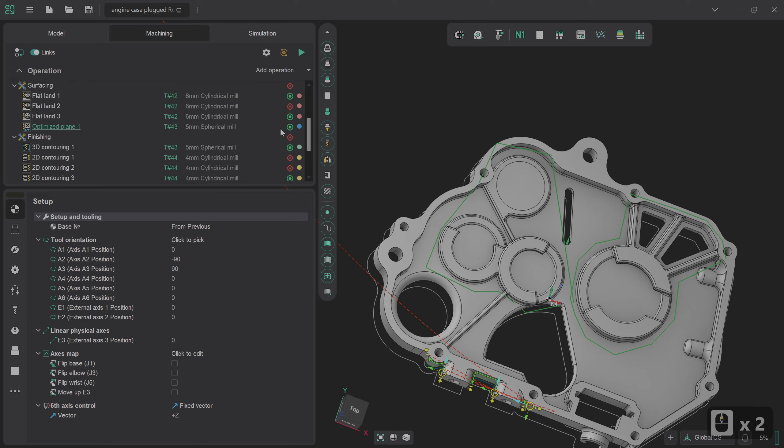So the first thing I'd like to focus on is cancelling out these red operation nodes. We're going to focus on the Flat land 2 operation first. If we click on the operation and hover the mouse over the node, it tells us what the error is, which is contact with workpiece on rapid feed.

This is an issue that can be solved in the links menu. So if we go there now, the two primary things I'm seeing that are causing some concern: one is the link clearance height, which is the height set for the tooltip to elevate by when it's moving across areas that it's already machined.

0.1 of a millimeter is rather small, so I'm going to bump that up to 2 millimeters, which is a little exaggerated, but with the amount of interpolation that goes on with robot motion, the more we give it, the easier a time it has.

And the other one is the safe distance, which is sort of an XY coordinate issue, whereby it's only got 0.6 millimeters to play with, which is a bit small. So I'm going to bump that up from 10% to 50%, which should give us 3 millimeters, and hopefully that should resolve the worst of those problems.

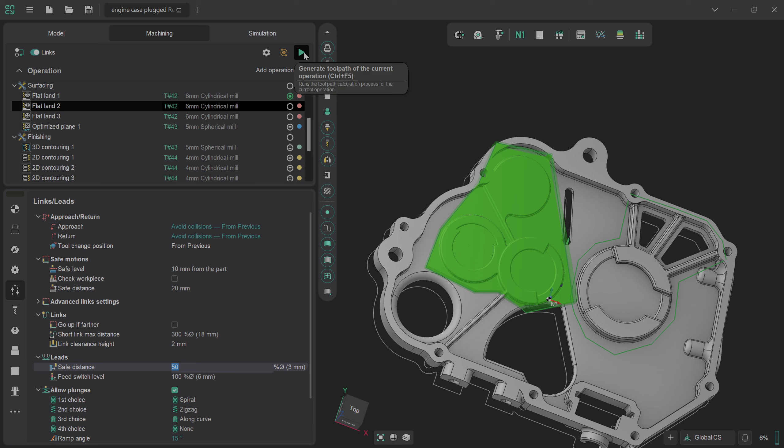So we're going to recalculate this now, and the unfortunate side effect of going back and making changes midway through is that it affects every subsequent operation as well. So I'm going to very quickly recalculate everything to make sure it's recalculated fully, because sometimes it does leave gaps.

Subsequent to that, I'm going to take a look at the other two operations that were still coming up red after the simulation. So there's a few more red things coming up here, but none of this has been simulated since, so I'm fairly confident that most of those are invalid responses.

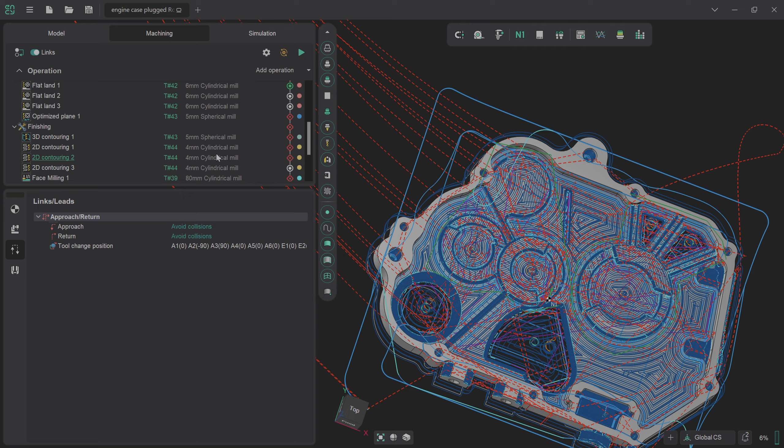However, the 2D Contour 1 and 2D Contour 2 operations were presenting us with problems. So if we take a look at 2D Contour 1, the first thing I can see that's likely causing an issue is the fact that we don't have any proper lead in or lead out, nor do we have any kind of plunge resolution.

If we hover the mouse over the red node, we can see that yes, contact with workpiece on rapid feed, and the ramp angle is too high. That means we don't have any proper ramping enabled, and contact with the workpiece on rapid feed means it just plows straight into where it needs to cut without any lead in.

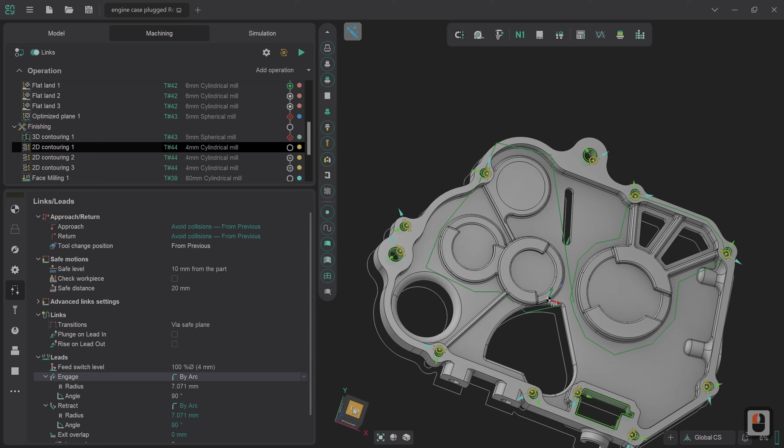So let's change that now. We can set the lead in. If we set the engage lead in by arc, 7 millimeters radius doesn't sound very big, but if we pan over to a top-down view, we can see this radius is going to exceed the bounds of these smaller holes. So I'm going to set that radius to 3 millimeters instead, which is much tighter, but should keep everything within tolerance.

We're also going to set a plunge on lead in. I'm going to set the height of that plunge to 100%, which is 4 millimeters, just to give it a little extra to work with.

I'm also going to increase the ramp angle quite drastically on this, because these are quite small holes to work into, there's not a lot of space for a very low angle to come in. So I'm going to set it to near vertical, but not quite - 75 degrees. And I'm also going to smooth the arc of that approach, so it's a 5 millimeter radius on there.

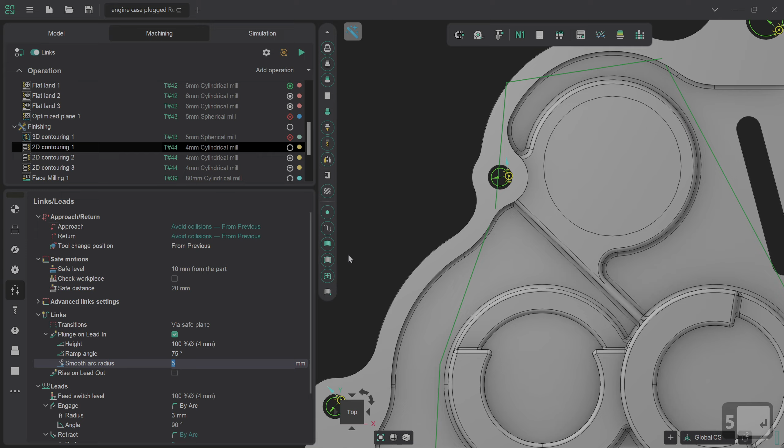Now, finally, there was one other thing I spotted, which I'm hoping you caught as well. In this large cutout area here, the placement for this entry point is not great - it's going to cause us problems because it's going to try and arc out into the actual workpiece itself.

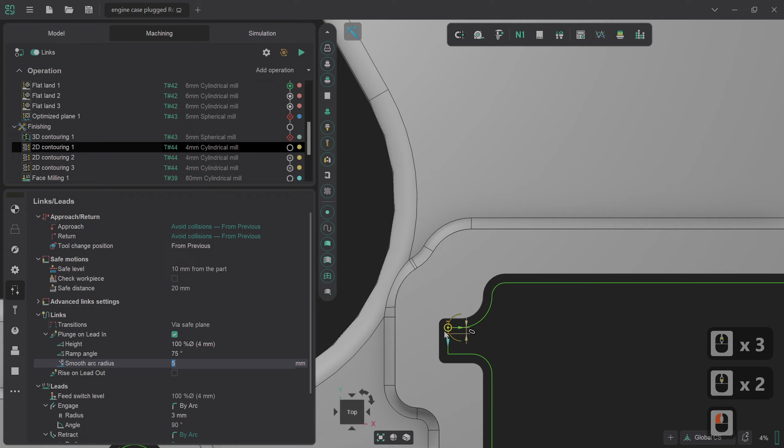So we're going to grab this and move it over to a straight area where it's got plenty of space to work with. And now we're going to recalculate all of the toolpathing for this. So if we regenerate that toolpath now, excellent, we should see that everything feeds in properly.

So I'm going to copy these same settings over to the 2D contouring toolpath as well, purely because I'm pretty confident this should resolve the bulk of our problems. And it means we've got a good starting point with no major differences between them if there's anything further we need to address.

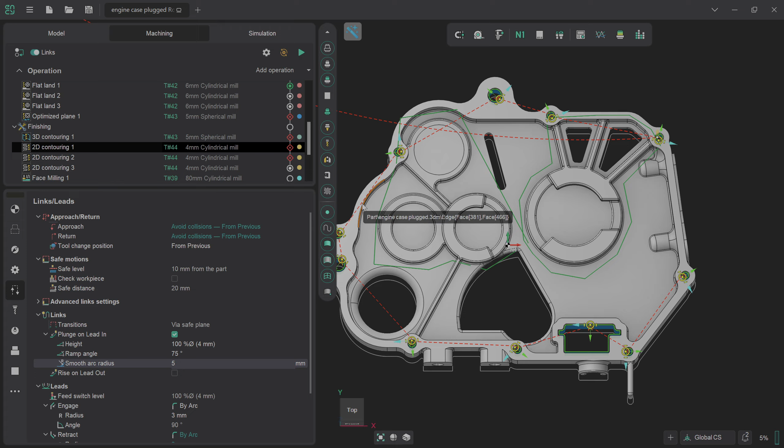So I shall very quickly do that now. Plunge on lead in, 100%, 75 degrees, 5 millimeters, with an engage by arc of 3 millimeter radius. And we now click on generate.

Okay, that's all looking good. Yep. So, after all of that, what I'm going to do now is I'm going to regenerate all of the toolpaths for all of these operations, and then I'm going to run the simulation as well. And to save your time, what I'll do is I'll come back once the simulation has been run, so you can see the end result, and you can see that all of the nodes are green.

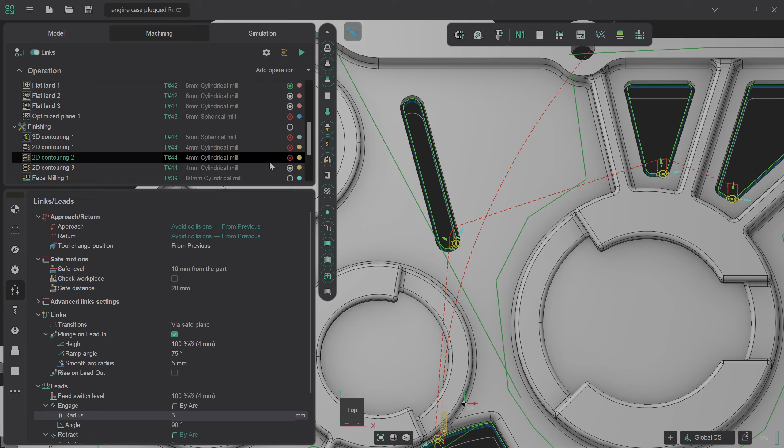Okay, so let's go back into a top view here so we can see everything clearly, and I'll catch you in a couple of minutes. Right, so now that we've come back, we can see that at the end of this simulation, every single node that's in here is green. So this is really good news for us so far.

There are a couple of things that we still need to resolve. One is the sections that are internal that haven't been cut completely cleanly, although these are very easy to fix. And also there is this section here that hasn't been cut particularly well. Now, realistically, something that's a side face like that would ordinarily be handled as a secondary operation with a fresh new orientation. We can, however, clear off some of these weird spurs that are forming along the edge of the wall here. So if we turn on verify compare, they should come up a lot more cleanly.

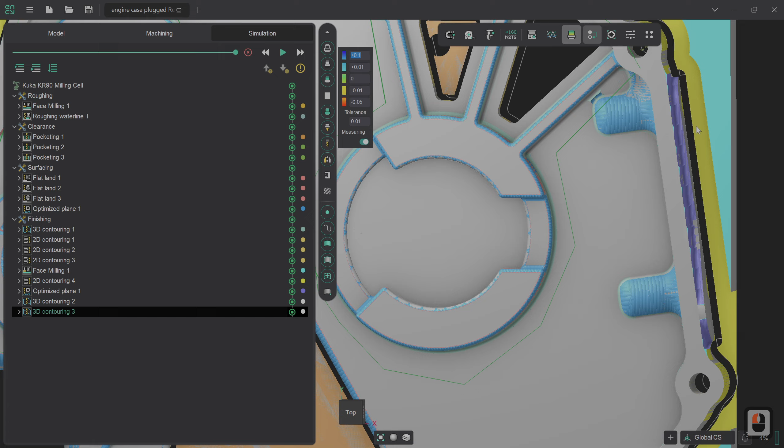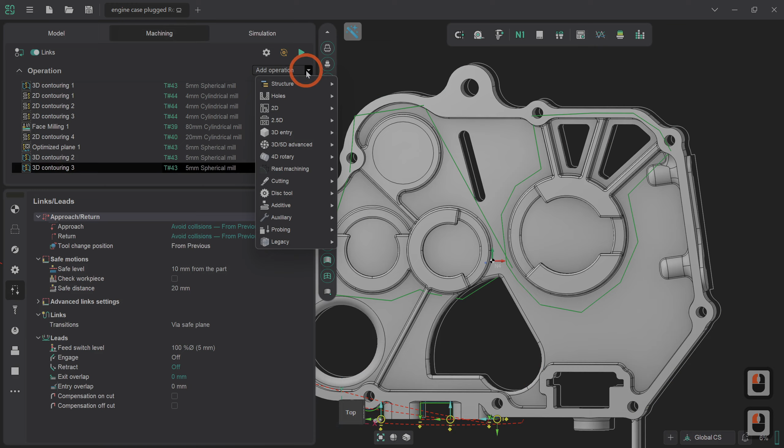You see these big blue jagged marks here. Okay, so we can resolve that. And as I say, these two little blue sections here are something that we also want to deal with. So to deal with those little blue sections, this is quite simple. We can just set up a new 3D finishing plane. It doesn't have to be very, very big.

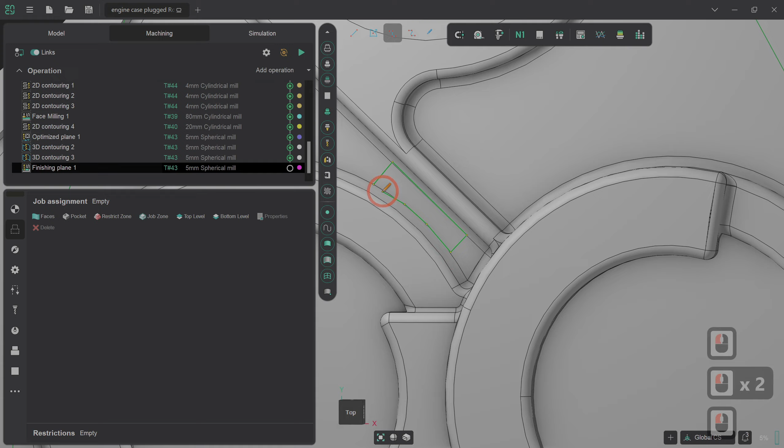So if we just look at the exact area that we need, which is just this little segment here, and if we go to job assignment, we can now draw a polyline specifically describing the exact area that we'd like to clean up, which I believe this should cover the majority of. So if we just highlight that for a second, and yeah, you can see that should do a nice job of it. And we also want to do this one as well.

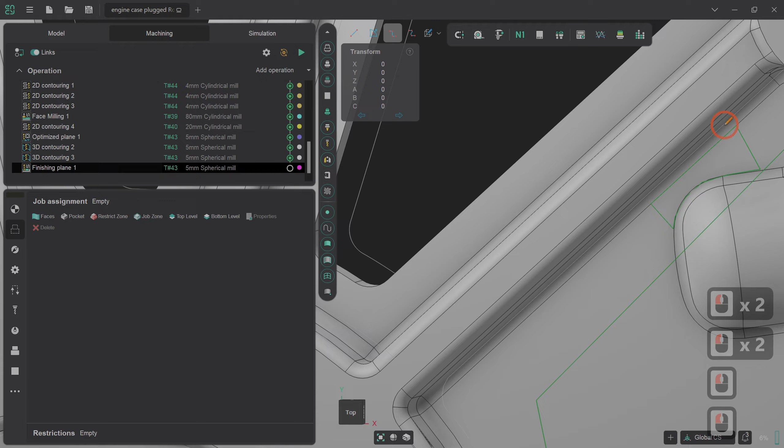So there we go, that's where we need it to be. So we'll define another polyline here. And that should hopefully cover everything that we require. So let's just check. And yes, perfect. Okay, so the important thing to remember, especially when drawing a lot of polylines on here, is to make sure to deselect the tool afterwards, because otherwise you'll start drawing errant lines everywhere, which is a bit of a pain.

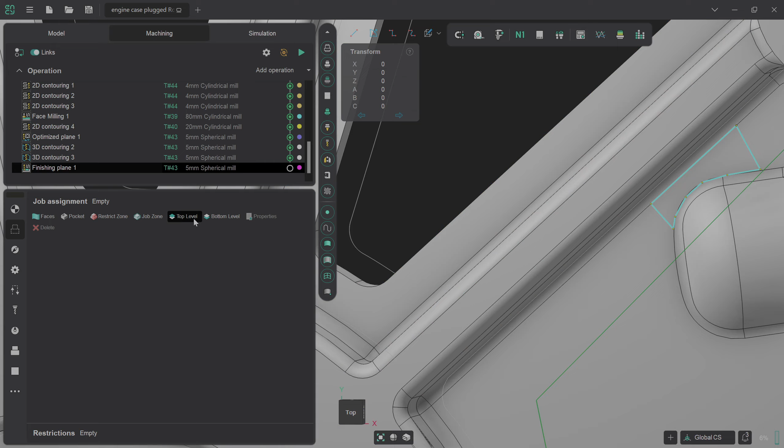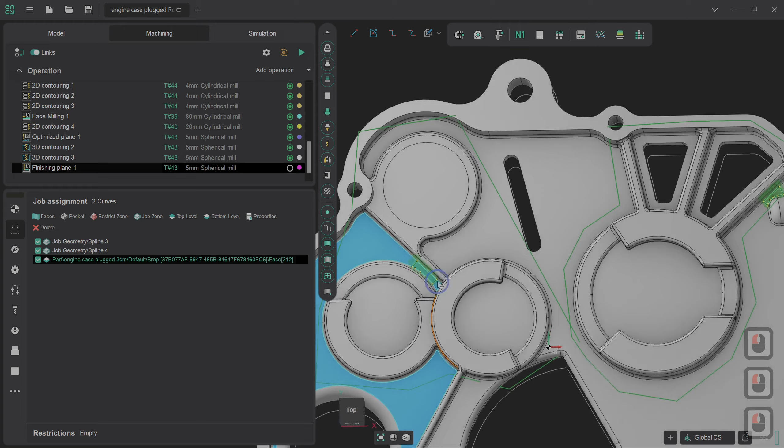And we now need to define both of these curves as the job zone. Interesting, I only had one curve selected there, so let's find out what the second spline is. So the first one, oh no, it maintained the selection of both. That is strange. Okay, so the next thing that we need to define is our bottom level. So I'm going to select this plane and click on bottom level because that's the lowest we want it to cut to. So under strategy, we can now look at what that height is.

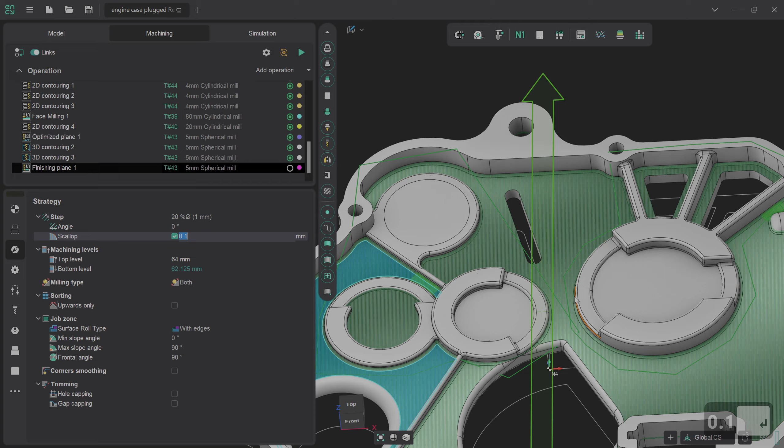We only need to take 2 or 3 millimeters down. So realistically, we can set this to, I don't know, 64, and that should be absolutely enough. I'll also turn on scalloping for 0.1 of a millimeter, just to be absolutely safe. Now we can also adjust the angle at which we're cutting as well, just to give our cutter the best fighting chance of getting in there. So I am going to rotate this by about 90 degrees or so, just to try and approximate the best usage of space there. So that should be absolutely fine.

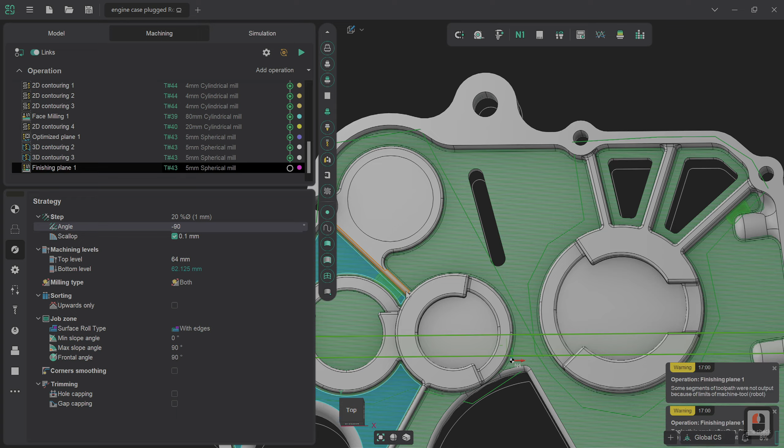We should now be able to generate the toolpath, and hopefully... toolpath is empty after run. Of course, we didn't set the 6th axis control. Set that to fixed vector and then regenerate. And there you go, we now only have 2 small areas that are being machined. Although for some reason it's not bothering with the second one, which is not ideal.

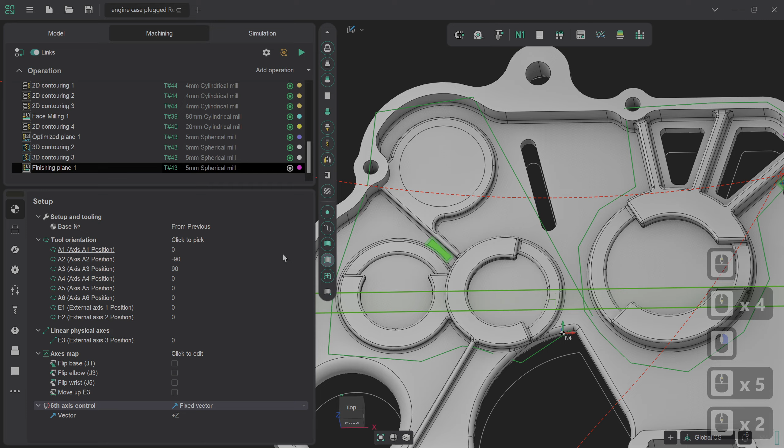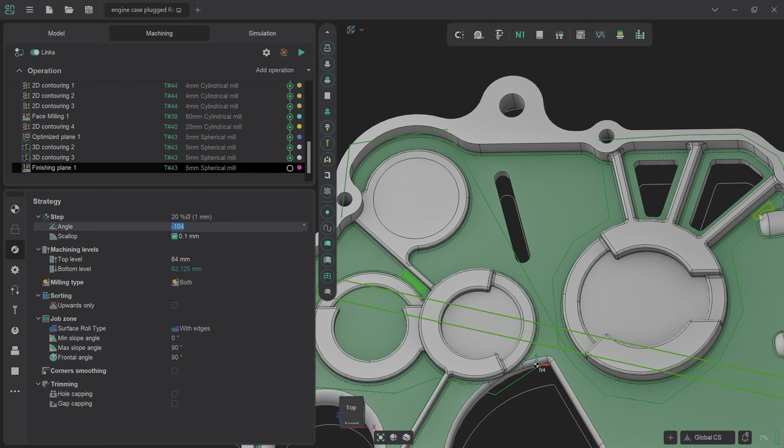So it may be that we need to change the angle of that slightly. So if we scroll that around a little bit, my main concern is that we don't want any of the movements or motions to be too short, because the shorter it makes them, the less chance it has of completely covering the area. So we regenerate that toolpath now.

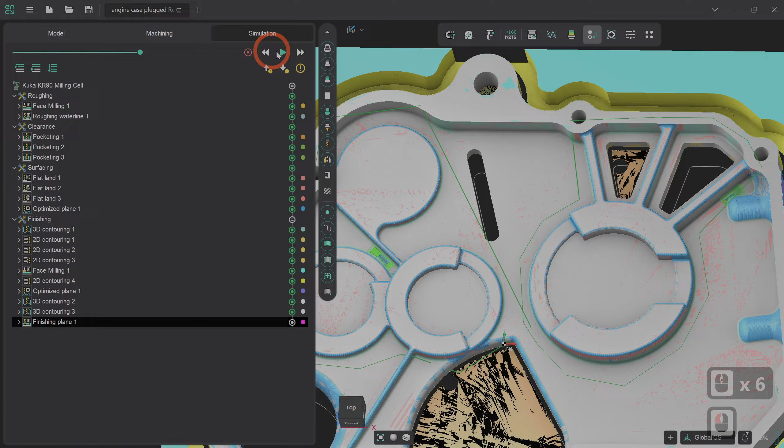Okay, it's still only doing that first one. So if we very quickly simulate this just to see what it comes up with, slow it down a tiny bit. And yeah, so it cleans up this area perfectly well. It doesn't bother cleaning this one up though.

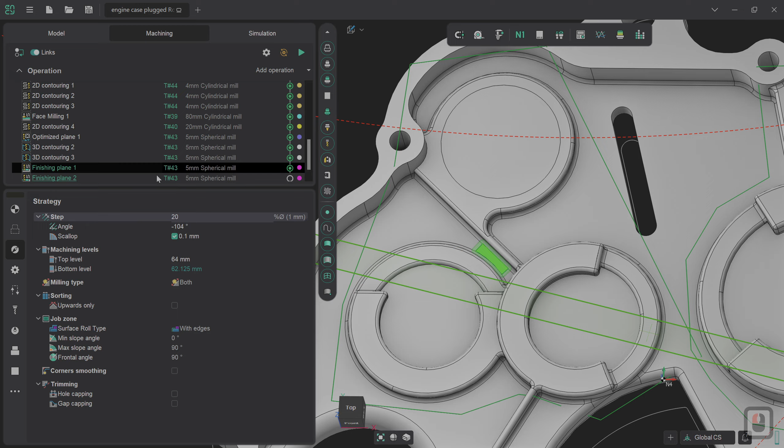So what we can do to force its hand is we can actually duplicate this toolpath and then just move this region into the second toolpath. So that may end up resolving our problem. It also means that we can adjust our angle accordingly if we need to as well. So we click on duplicate, and in this one we delete the first geometry, and in this one we delete the second geometry, and we recalculate both of these.

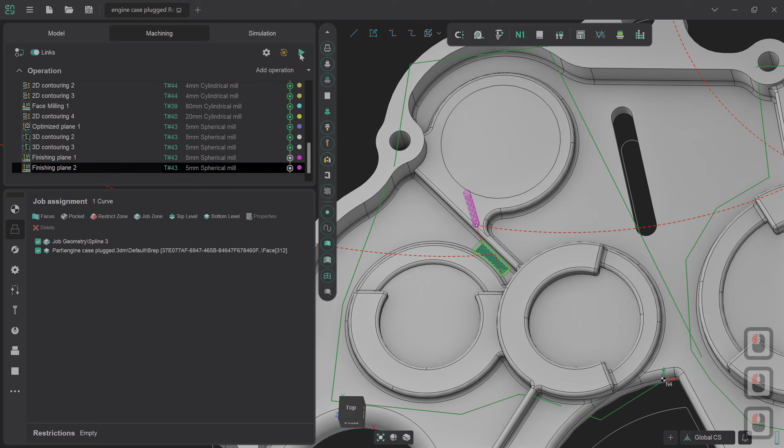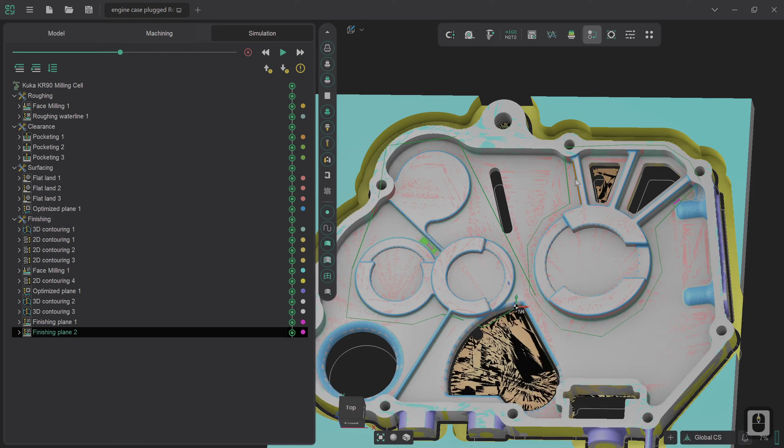Excellent. Okay, that should be absolutely fine. And we can now simulate both of these from where we are. So slow this down. There you go. So that's the first one. And now we have the second one being machined away, which is perfect. So that should give us a much cleaner surface finish there.

And you can see how there's a tiny amount of pale blue, but nothing serious there. And bearing in mind the pale blue is only 0.01 of a millimeter difference. So overall, that's pretty good.

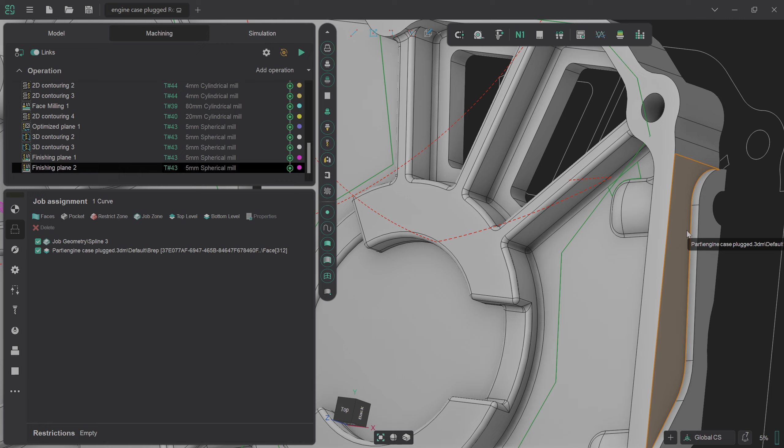Now, finally, I would like for us to try and clean up this edge a bit. Now, there's a couple of different ways we can try and approach it, but I'm going to go with the simplest and the least likely to go wrong. And that is going to be using a 3D contouring path just to follow this curve up. That's it, nothing more. Okay, because as soon as we start following it down, we start running into compensation issues, which can lead to gouges of the part.

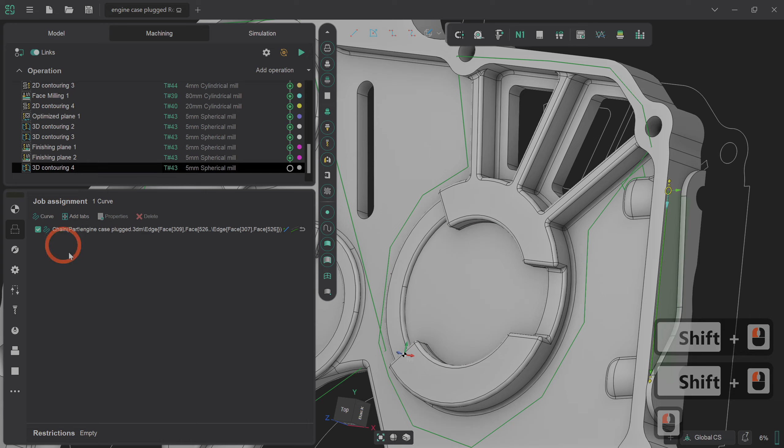So if we go to Add Operation, 3D Entry, and 3D Contouring, we can now define this curve as the curve that we're after, and we want to make sure that there's the offset defined here as well. So when we pan over to the top, we can see that that line is now offset from here by half the tool width. That's great.

The next thing that we need to define, so as to avoid any kind of gouging issues, is if we go into strategy and we set the bottom offset of this as well. So I'm going to set this to 1.5 millimeters, which should give us just enough clearance to be able to make a very nice, quick, clean scoop of that. Okay, so we'll go back to Setup, and define the tool axis control to fixed vector, and press Generate.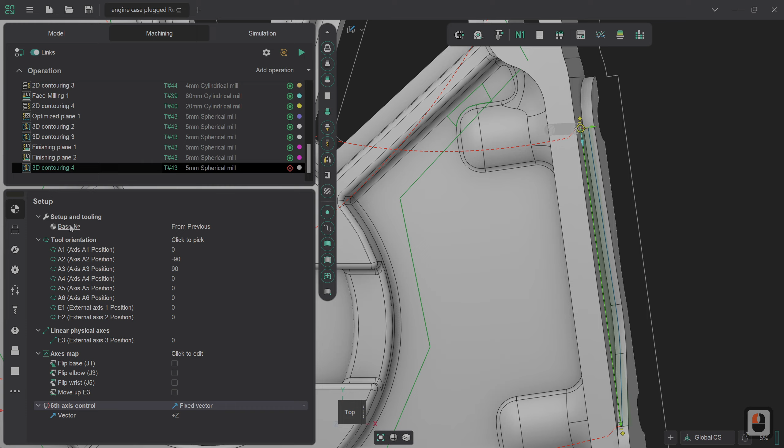And with a little bit of luck, hang on, we've got our first problem here. What's this reporting? Contact with workpiece on rapid feed. Okay, we know how to deal with this. So if we go back to the links menu, and we set engage to by arc, it should swoop in and out nicely on that. We don't need to bother with dealing with the radius of that or anything at this stage. That should do us well.

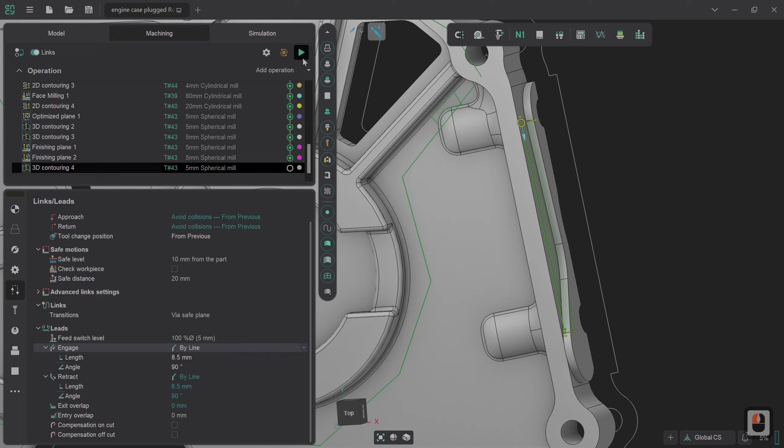I'm also going to, actually no, I'm going to set that by line because I would like it to come off and on nice and cleanly. Okay. So we should be able to recalculate that now, and hopefully we won't run into any problems. There's none indicated there. So if we simulate this now, we'll run this nice and slow just to check. We'll click on Run. You see the tool coming in here now.

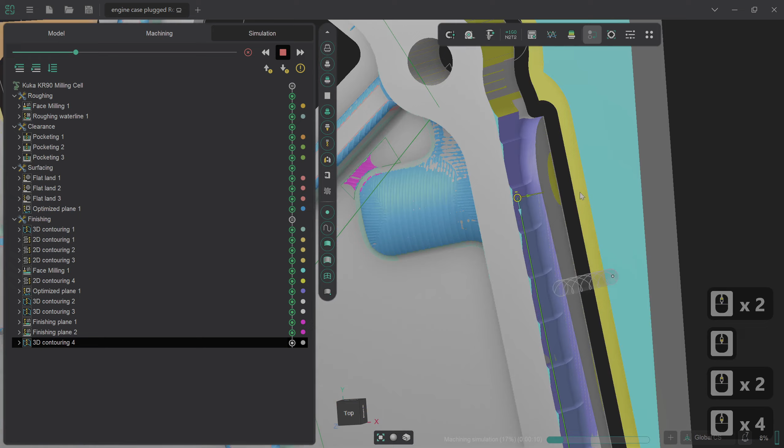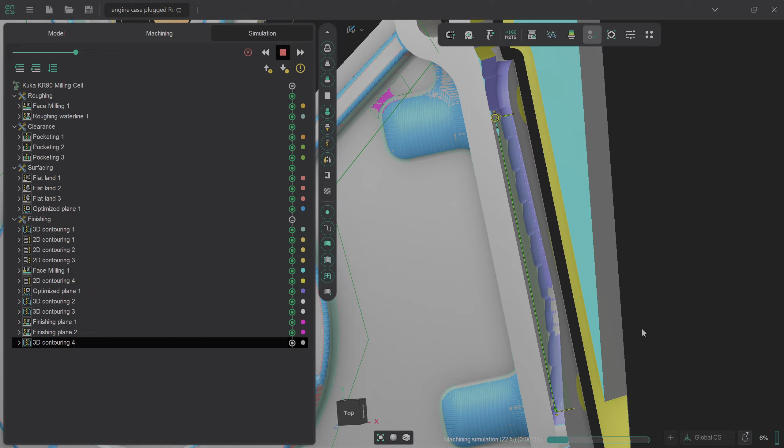Okay, so that now comes in, and all it's doing is just scrubbing off those spurs there, nothing more. Okay, because this is already fairly close to final height, and we're not going to achieve a perfect result with a ball nose finish, because again, that really is something that wants to be handled at a different approach. But for scrubbing off as much material as is possible to try and minimize that load going forward, I think that's probably about the best result we're going to achieve with this.

So we'll wait for that tool to figure out where it's going now, and once that's finished we should get a green node there, which is great, and with the verify compare we can see that the vast majority of this is now green and clean.

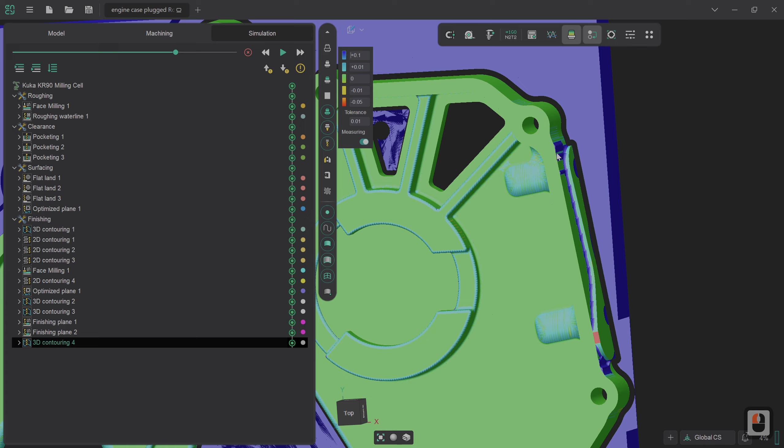This is about as close as we're going to be able to get to completely finishing a project on this kind of a shape. So ordinarily this sort of form would be done probably with more 5-axis motions, but we have managed to stick entirely within 2D and 3D operations throughout all of this, which I'm hoping has highlighted the versatility of these operations to you, as well as illustrating just how powerful some of the tools for being able to fault find and troubleshoot ENCY provides us with.